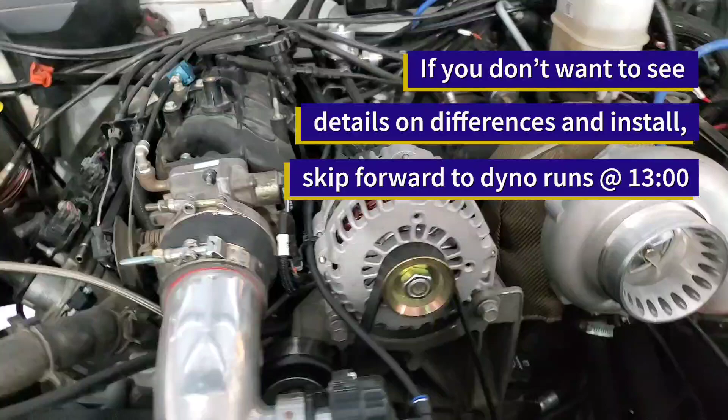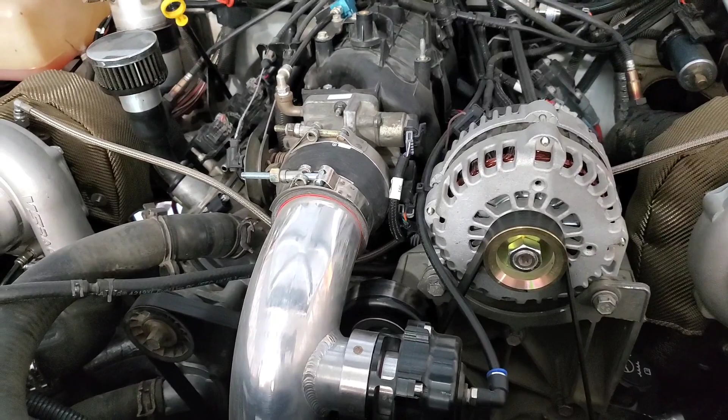There's quite a bit of videos on YouTube showing how to do this intake swap, so I'm not going to do a how-to on this one. But I will show some results before and after, and maybe take a few short clips in between if there's something I want to show you guys.

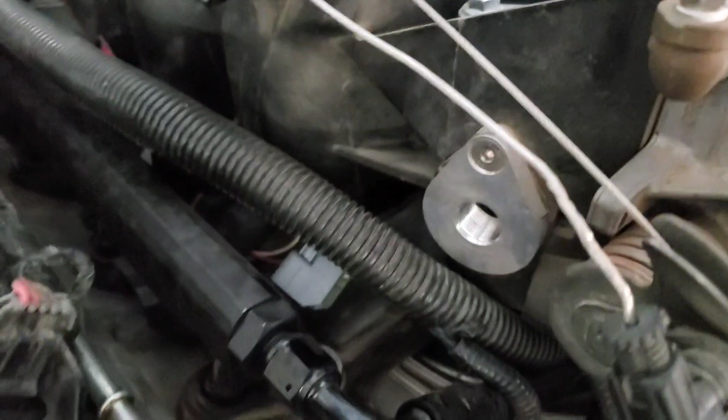I do want to point out I have this evap block plate on this intake, as well as the EGR block plate, which I had my intake air temp sensor mounted in there.

And I'm running these eBay fuel rails that somebody suggested on Facebook. I don't remember where, but somebody told me to look on eBay for them. There's a logo on them, I cannot quite remember what brand they are, but if you guys are interested in these rails, just search on eBay for Silverado truck intake fuel rails, and they come with the proper mounts that you need, so they bolt right in. My injectors are a little bit longer, so I had to put spacers.

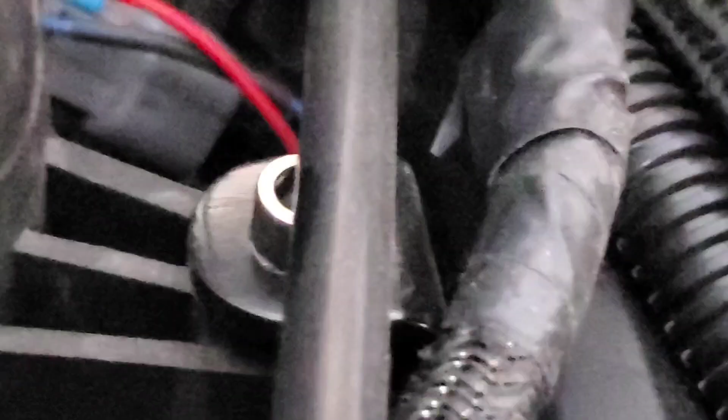I don't know if you guys can see, but I ended up having to put spacers underneath the bolts. Let me see, can't get a clear shot of it, but I'll take a shot of it once I take the intake off. On that one, maybe you can see - yeah, little plastic spacers underneath them. So yeah, they work really well, bolted up really nicely, no leaks, nothing. So I'm very happy with them.

But yeah, I'm going to go ahead and get started.

All right guys, we are back and about halfway there. Actually, putting it together always takes more time than taking it apart, as we've learned so many times. For those of you that have worked on cars, it's a lot harder putting stuff together than taking it apart. But let me show you a little comparison between the two.

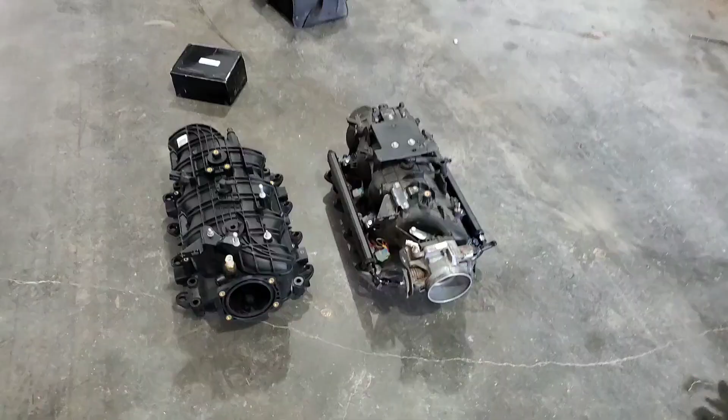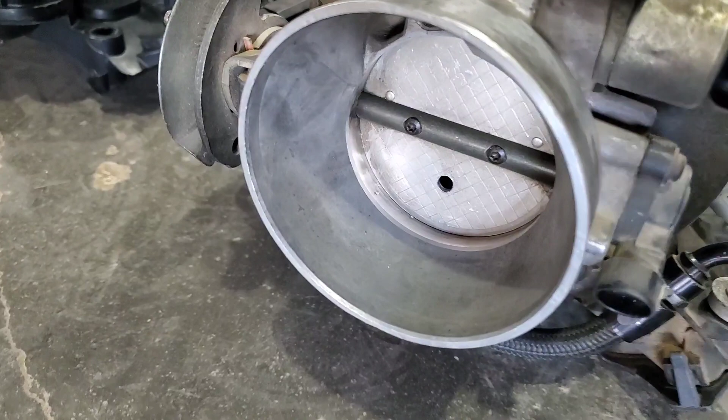So here's the old throttle body that's been on the truck, or intake, sorry, and throttle body. I've been running an unported stock throttle body, unless you call drilling the air hole out porting. But yeah, it's a tiny little dude. It doesn't look too bad, but compared to the new one, it looks pretty tiny.

There's my new 2000cc injectors from FIC. These rails, like I said, use the factory bracketry, or mounting points I should say, and they bolt up from underneath. So they're pretty nice, I'm actually really impressed with them.

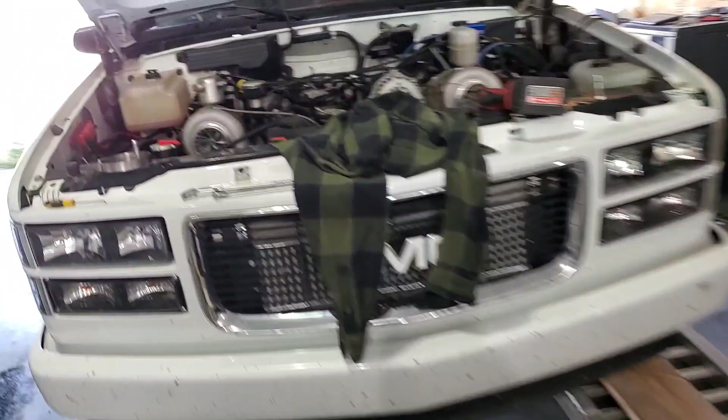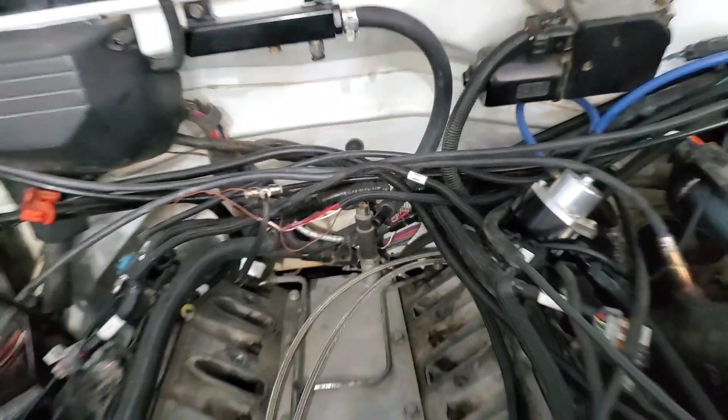But yeah, so we have the same vacuum port in the back on both of them, which I am using for my vacuum block here. I don't know if this thing will slide into that intake. I might try it, and I don't have to pull it off of that hose. Let's see what other - this vacuum port I'm using for my fuel pressure regulator. This one also has it, hasn't been opened up yet.

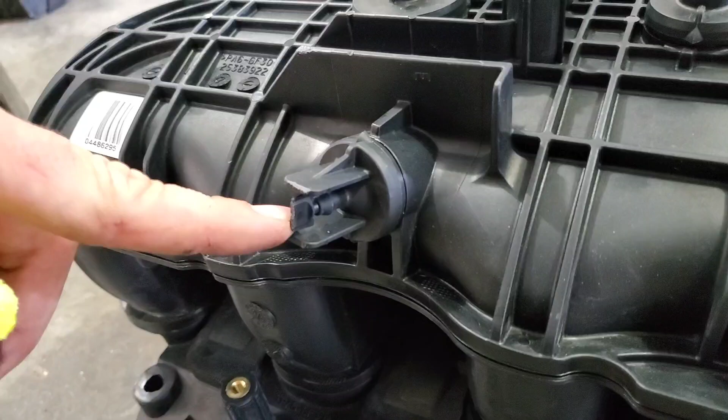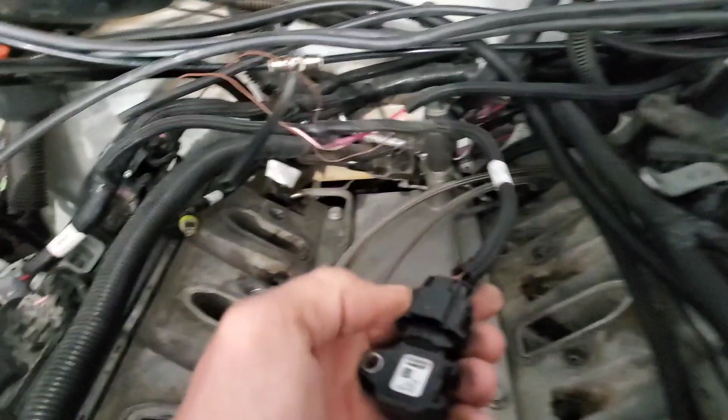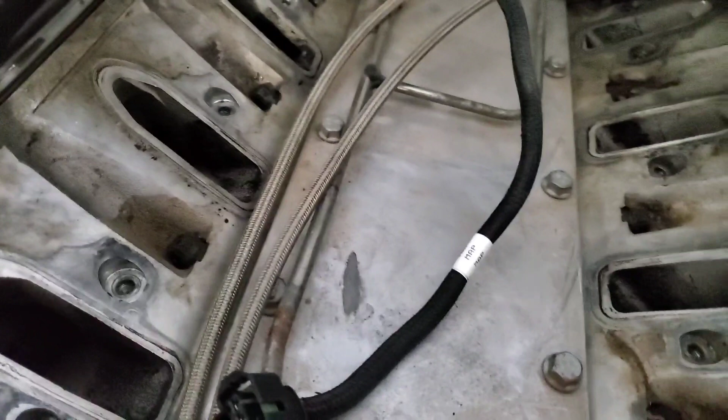This is an LSA plug, which I modified to make it work. Let me unplug it here, I'm going to have to put the phone down. So what I modified was those two teeth right there. I had to cut them down, the bottom two, so it only has the top two. I didn't cut them all the way down, so it plugs in a little bit hard, but it works because this thing does not have room for teeth.

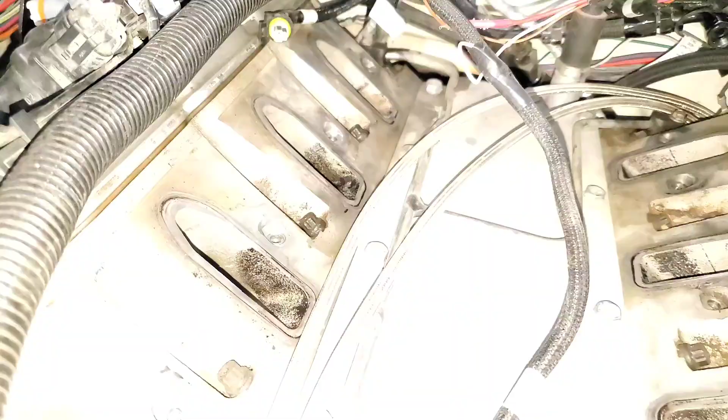Let me see if I can get some light in there, turn my flash on. There you go, you can see the notches are in a different spot, they're actually closer together, the bottom two. The top two are the same amount apart. So the top two work, but the bottom two on the LSA MAP are further apart.

This is an LSA MAP adapter harness from Holley actually, and I hardwired it into my Holley harness. So anyway, I made that work.

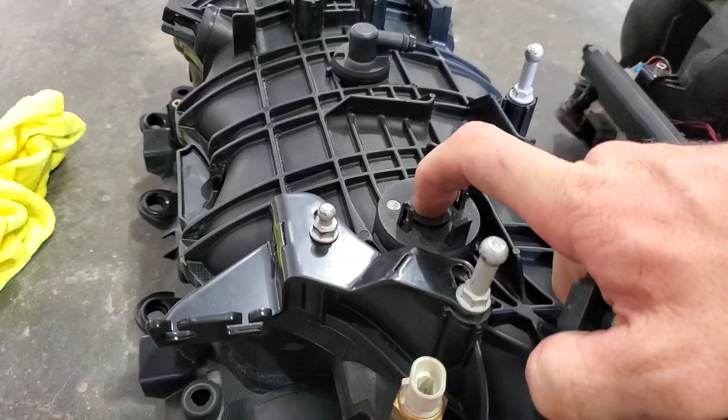Let's see, I was actually hoping that this would fit, but it does not, so I'm going to have to plug that hole. I'll probably use this with a short piece of hose in between there, and we'll use that for the MAP sensor. I think that's going to be my best option.

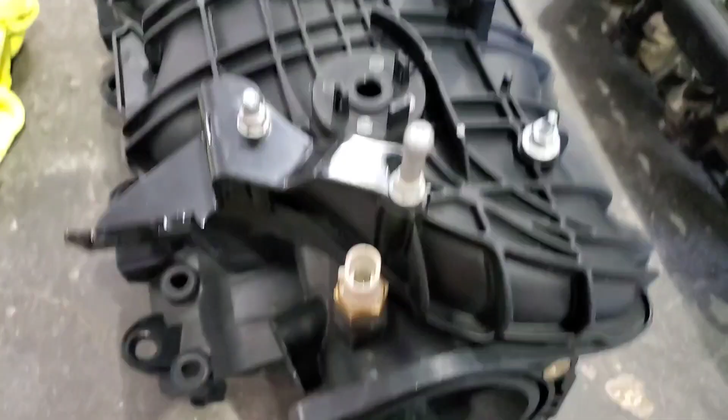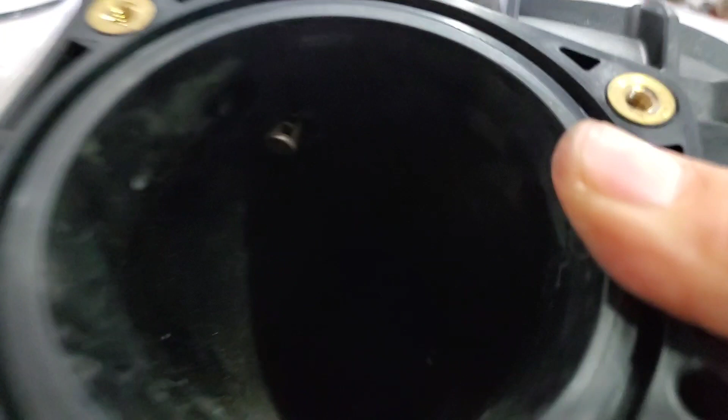And the IAT, this was factory, it was an evap port, kind of like where they had the solenoid on the newer trucks with the solenoid in line. So this just had a port. I cut it down, drilled it out, tapped it, and got that in there. You can see where the sensor peeks through a little bit, so I think it's enough to get a pretty good read on it.

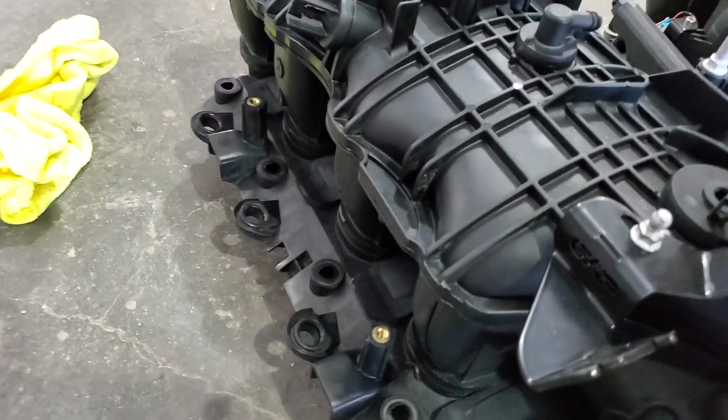So I'm going to get these rails and stuff swapped over. Oh yeah, I also bought this - what brand was it again? It was GAP Performance, I think. Or GAP, Glenn's Auto Performance, that's what it is. I bought that bracket, it looks really nice and it's adjustable, so you can slide it to make it work right.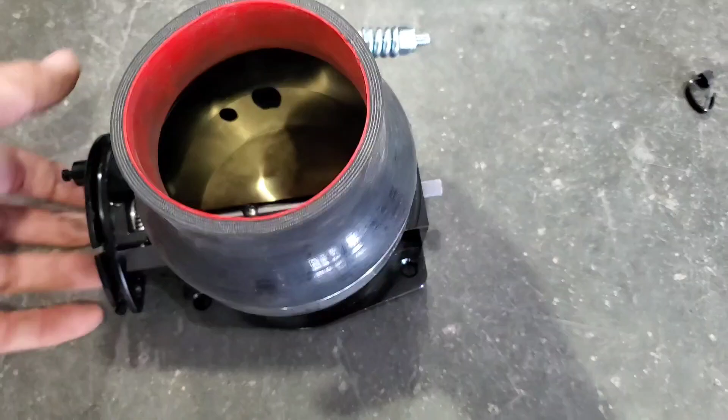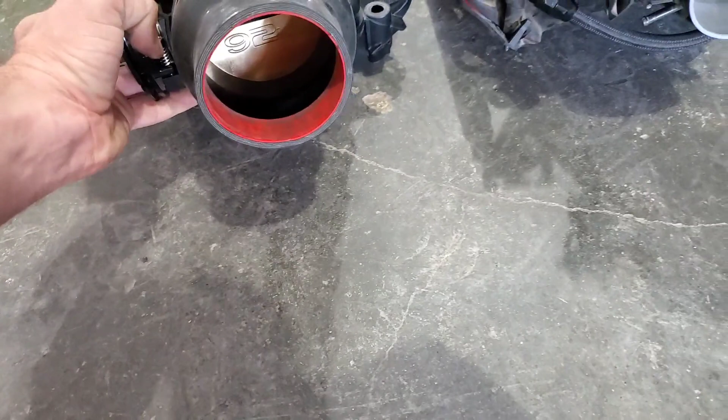And I bought one of those cheap Amazon throttle bodies, it was like 80 bucks or something like that. No, I don't have a video of it without the boot on there - I put the boot on. It was a little bit of a hassle fitting it, 92 millimeter, so that will go right on there. I'll take that throttle body off and put them back to back so you guys can see the blade size difference.

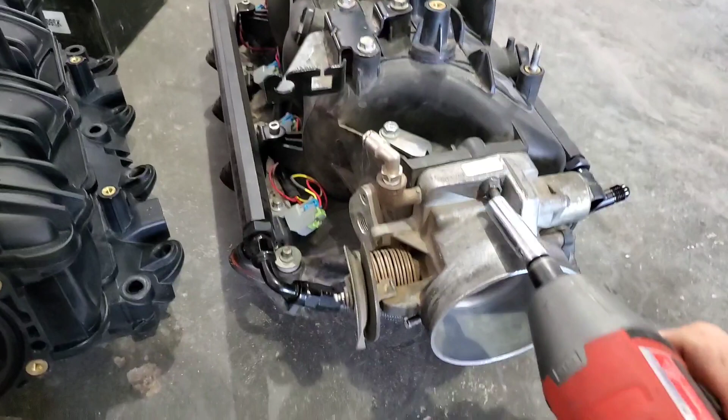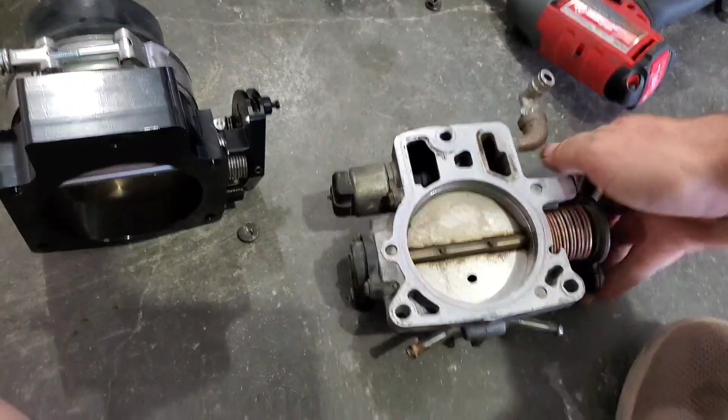So that is the stock throttle body, and that is the new one. I'd say there's a significant increase in flow. I guess it kind of depends on how you hold it, makes it look a little bit bigger - can't really get them really close, but it's quite a bit bigger. So it should gain a little bit of airflow there for sure, but I still don't think it's much of a restriction on a boosted motor, but it does something for sure.

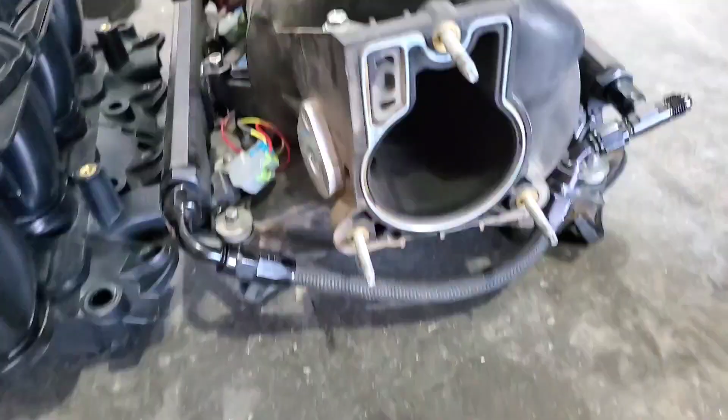So there's the intake side-by-side openings - obviously you can see the difference there as well. But anyway, I'm going to get this stuff swapped over and we'll get back with you.

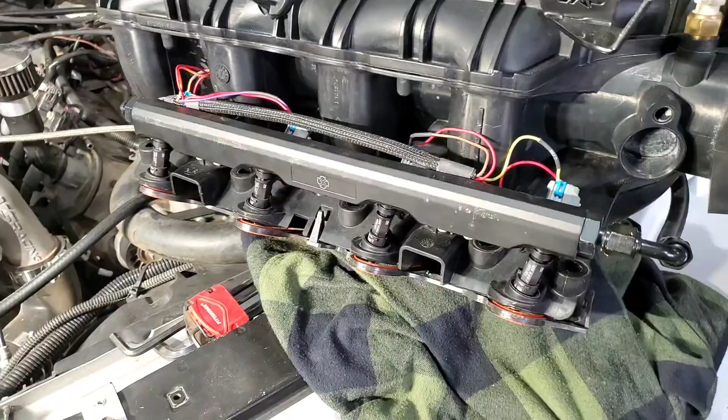All right guys, so this is the finished intake. Whoops, I scratched it up a little - that's right, it won't stay new forever. I actually bought this intake used, but I washed it at the car wash with some degreaser and it turned out really nice. Got the throttle body all mounted up.

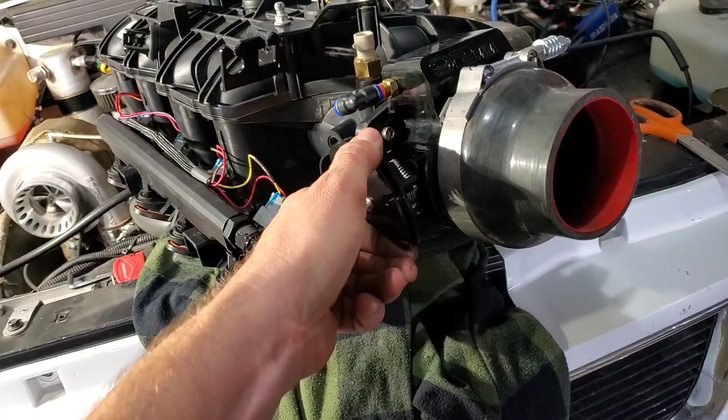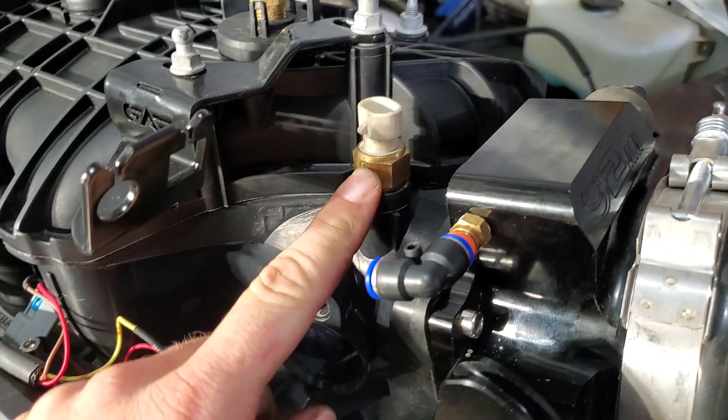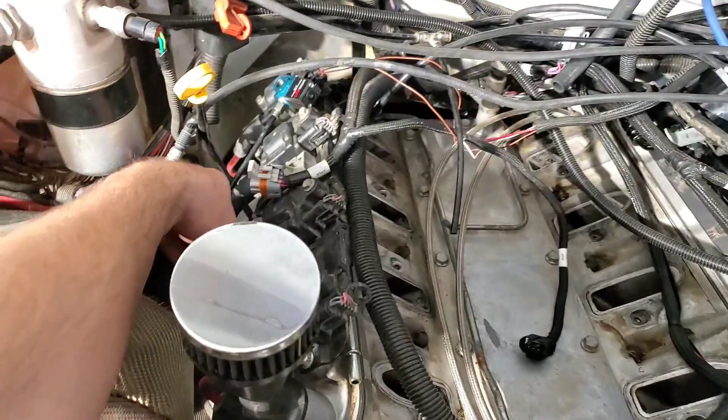Oh yeah, lots of airflow. Intake air temp sensor here, I think I already showed that. I did this for my boost control - my boost solenoid is right there, it lays over the top of the intake and goes in there. That runs to this hose, which goes to the top of each wastegate.

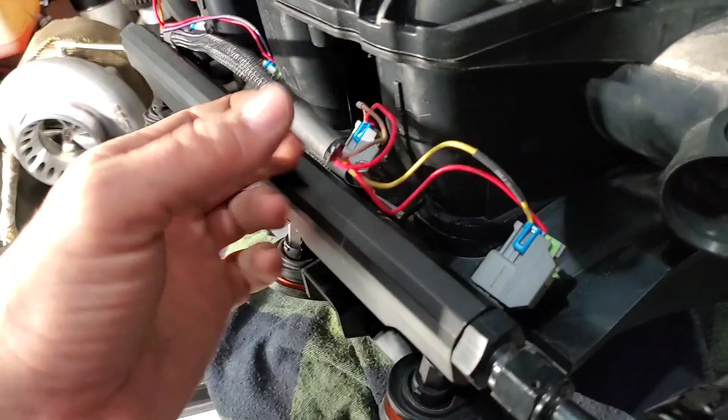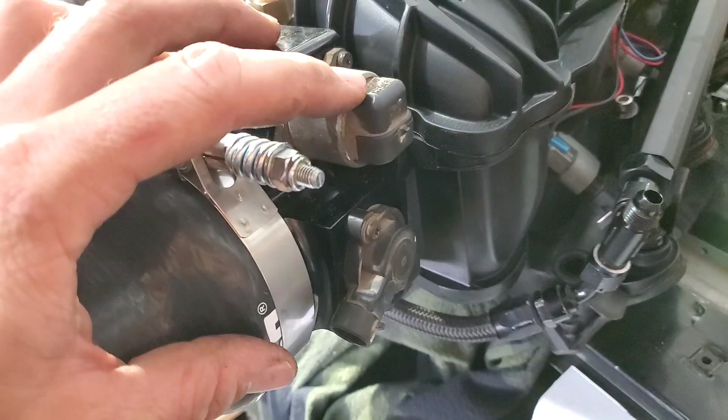Let's see what else - the rails fit great, I had to change the brackets out to make them fit. The IAC and the TPS all worked off the old throttle body, even the gaskets - the gaskets are off the old intake, and they're a direct fit on these intakes as well, for those of you that didn't know.

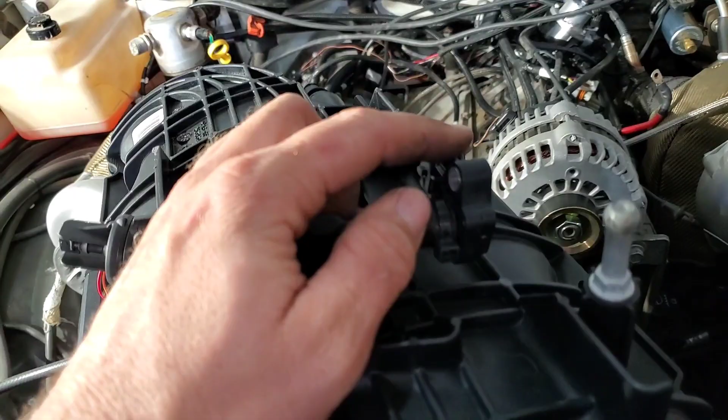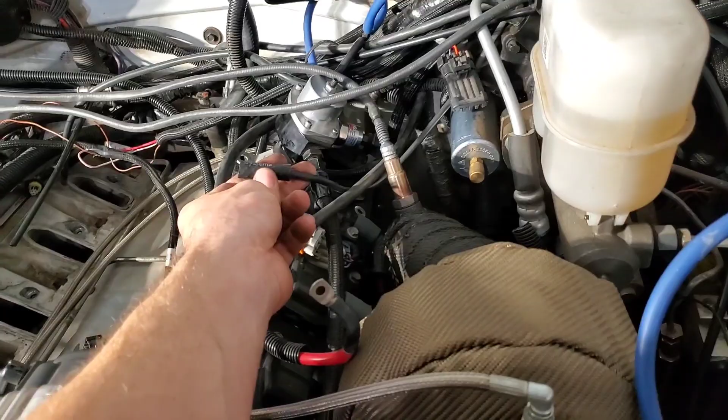I ended up plugging the MAP sensor hole, and I'm using that one for the MAP sensor instead - I'm not going to use this one. I'm actually going to get everything out of that vacuum block right there. I'm going to get the boost gauge, which is this hose, put a little fitting on there and run it directly over to the vacuum block instead.

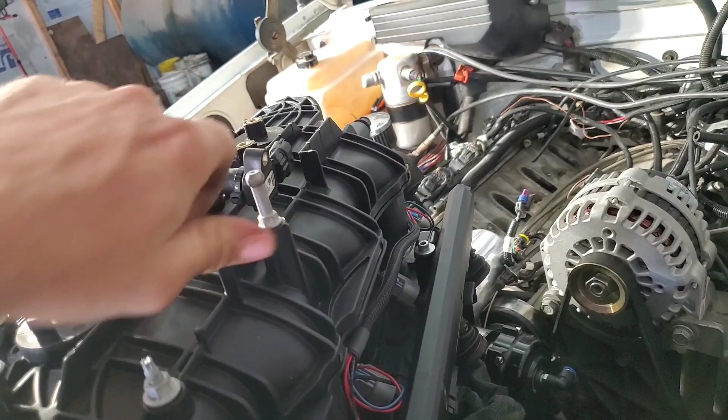Let's see what else - oh, and the fuel pressure regulator line I'm going to also run to the vacuum block. So we'll clean up a few fittings off the intake so we don't have to have as many on here. We'll leave these on there. I want to put an engine cover on it eventually.

So yeah, I guess I'm ready to put this back in there - it's not going to be very fun. What's crazy is those ports actually look kind of dirty, but they are cleaner now than they were when I put the heads on there. So E85 really cleans the ports up, so that's nice. But yeah, I guess we'll do some more video once I get it done.

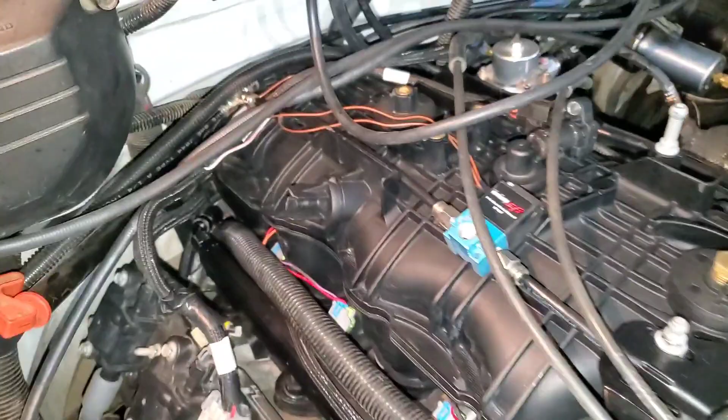Hey, what's up guys, we finally got done putting the intake on, the camera around. It was a lot more work than I thought, but we got it all lined up everywhere, no leaks anywhere. It worked out pretty good. The only thing I didn't like was the angle of the pipe going into the throttle body, because the throttle body's angled up on these TBSS intakes. But that's the only other difference as far as everything fitting, so otherwise it worked out pretty good. I'm going to go ahead and make some runs and we'll see what she does.

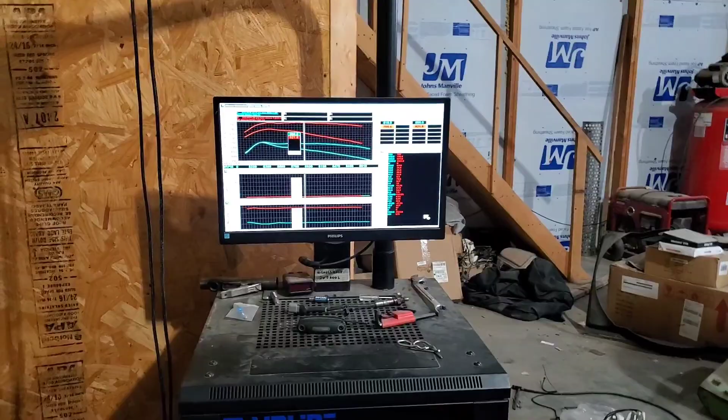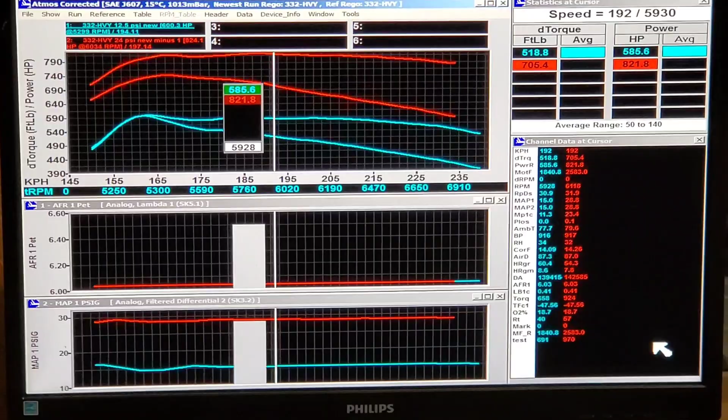Alright guys, so basically these are my previous runs. We got 12.5 psi, made 600 horsepower, that's the teal lines, and then we got 24 psi, and those are the red lines. So yeah, we'll see how these two compare. I'll go ahead and make a run here.

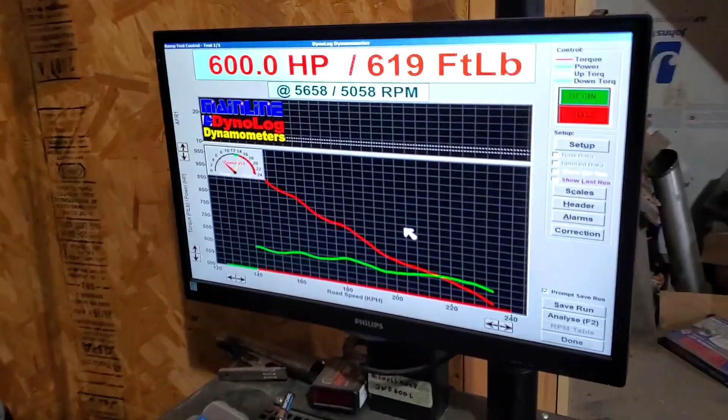Alright guys, so after analyzing the run, the weather is slightly different, so I don't know how much that has to play, but it looks like up top it was definitely gaining more power. As you can see there, it picked up about 22 horsepower, went from 557 to 580.

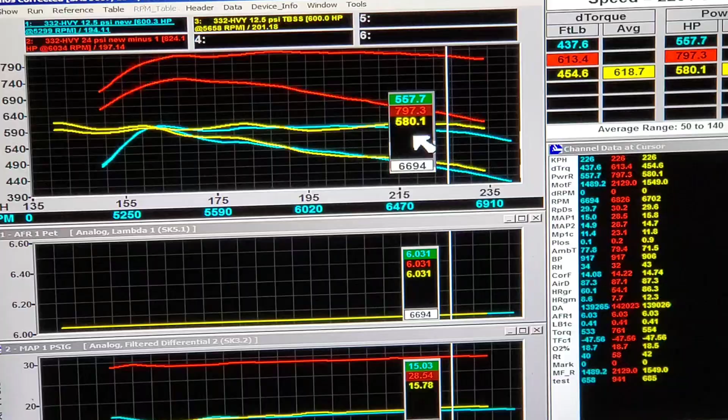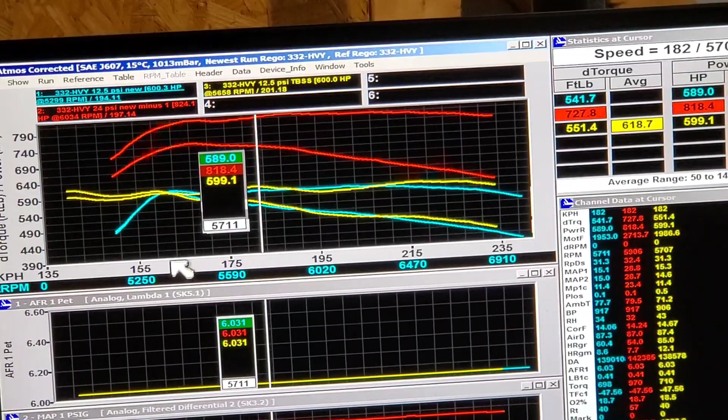But the peak horsepower was pretty much the same between the two. You got your 600 peak. This one made it at a higher RPM though, right here, 599, where the other intake was making 589, so it was down 10 horsepower.

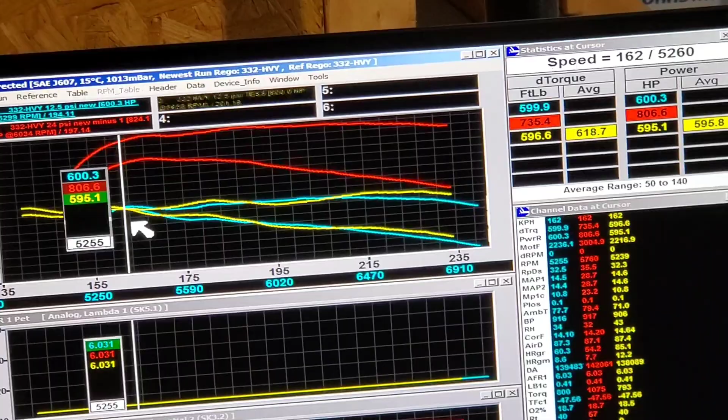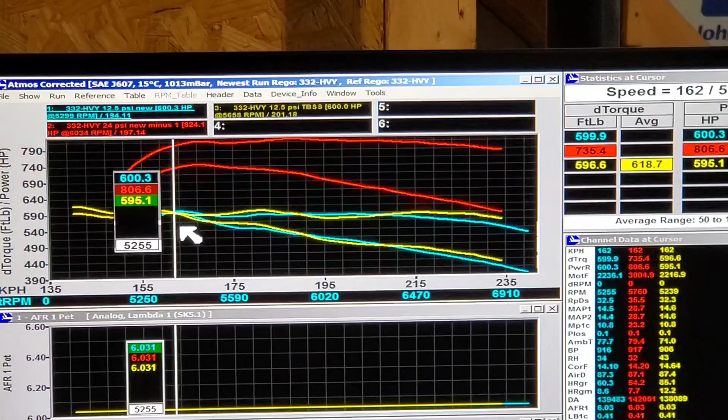But down here, at this RPM, 5200 RPM, the stock truck intake did a little bit more, but that could have been a boost spike as well when the boost came in, because that's where it peaked out. Looked like it was up everywhere except here, and I can't really say what caused it to be down here a little bit.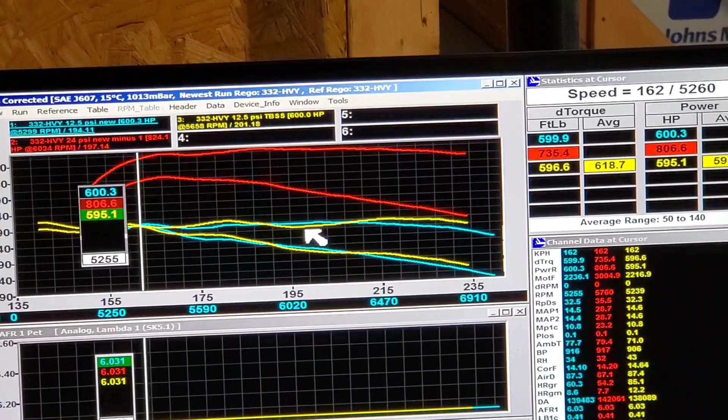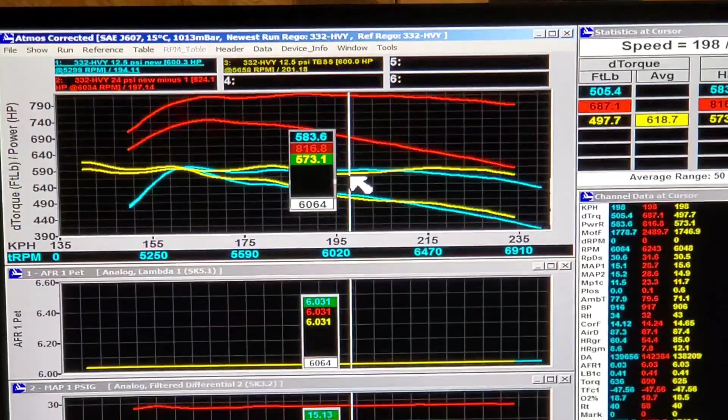Maybe a little too much timing or something. Looks like we were at 583, 573. It was down 10 horsepower right there for some odd reason. So we picked up a little bit of power, not very much though, and we'll see what happens when we go a little bit higher boost. Go from there.

Alright guys, we're going to do a pull now with 24 pounds of boost. We'll see how it goes.

Hey guys, I just wanted to cut in because I totally forgot to go over the data for the 24 PSI pull. It gained about 10 horse on the peak, but again, the peak was something that was only relevant at the very beginning of the pull, because with my torque converter, it makes the most power at the beginning of the pull almost every time. But where I noticed the biggest gain was throughout the higher RPM. Again, it was up about 20 horsepower or so throughout the run. So I just thought I'd share that in here real quick, since I forgot to record going over the data when I was at the dyno at the time.

And these next few runs are going to be on 27 pounds of boost. Alright guys, we're going to make another run on 27 pounds. 27.1, just like we did the other day. See what it does there.

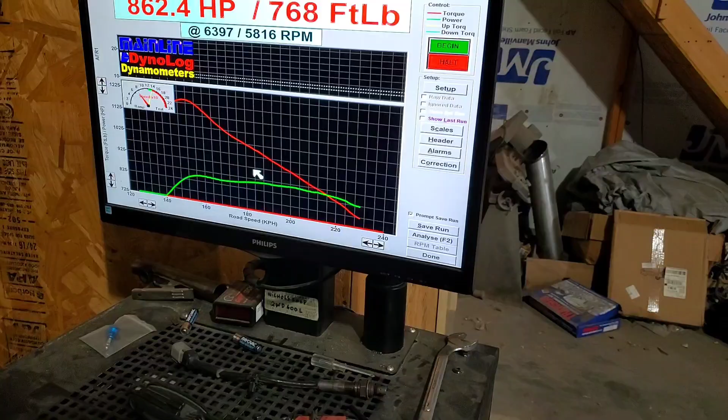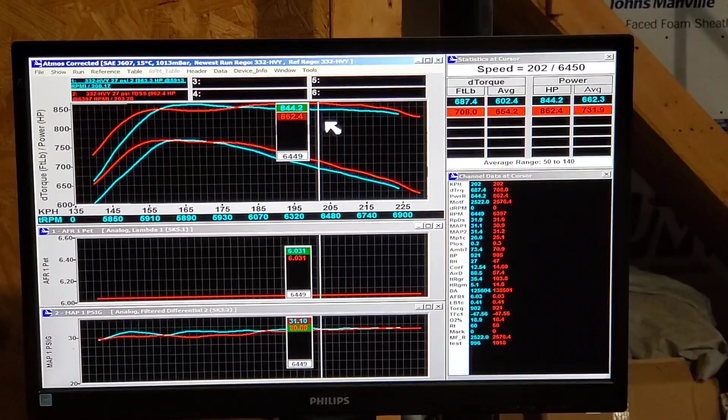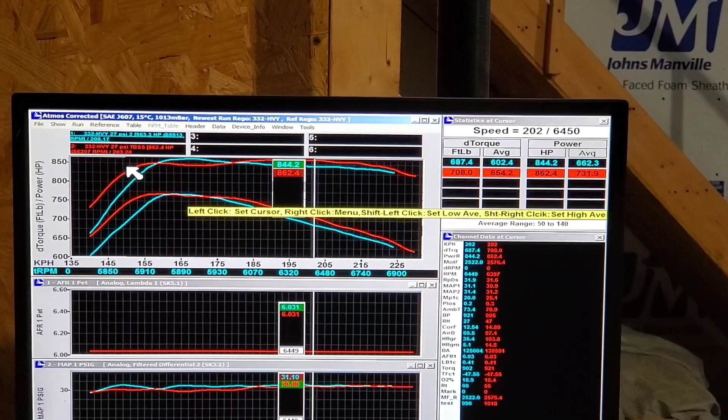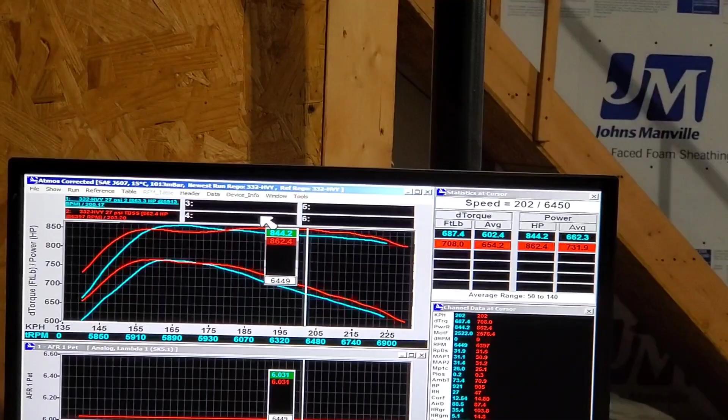Alright guys, so here's a comparison run. 27 pounds with the other intake and 27 with this one. Now what happened over here, the red run was the one I just did now. So I started the run with more boost built than I did with the other one. So what happens on the data log, you can actually see it. The boost climbs quickly, wherever it peaks up and then comes back down. So this run right now, it peaked up here and then came down and then it recovered and brought the boost back up. Granted, this is only like a pound or so, but a pound of boost is 20 horsepower.

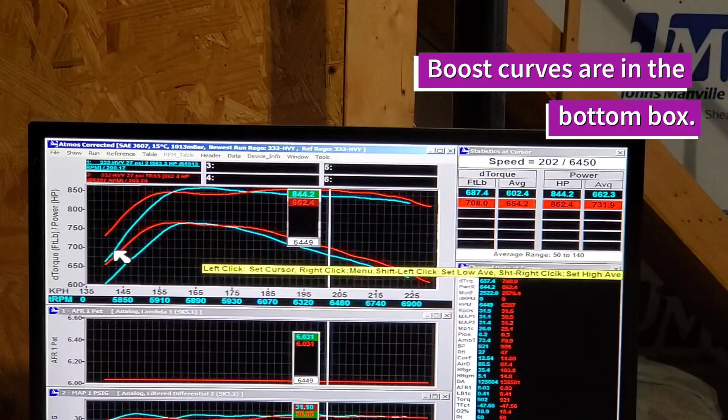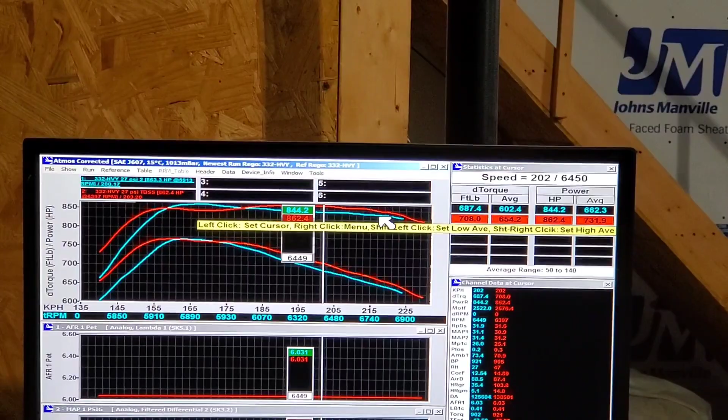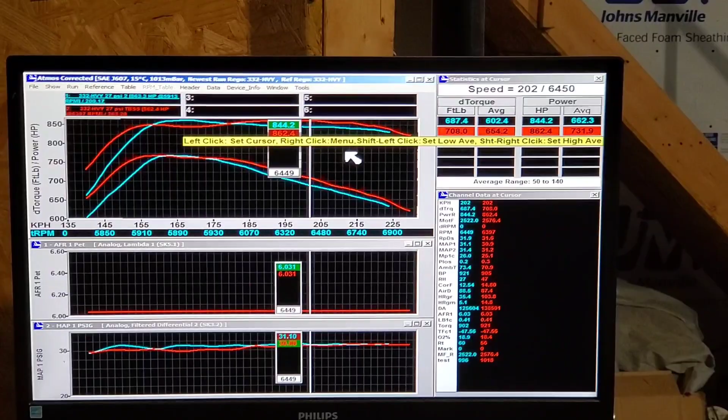And the teal line was the run from the stock intake, and it would overshoot the boost a little bit more and then come back down. But as you can see here, we did pick up about 20 horsepower, 10-20 horsepower through most of the run. So it was a slight improvement, not very much for the intake. But again, I was already thinking that anyway. It's my heads that are limited, not the intake manifold. At least with this intake manifold, long runner. If I went to a short runner, we'd see a lot bigger gains up here, up at the higher RPM towards the end of the run.

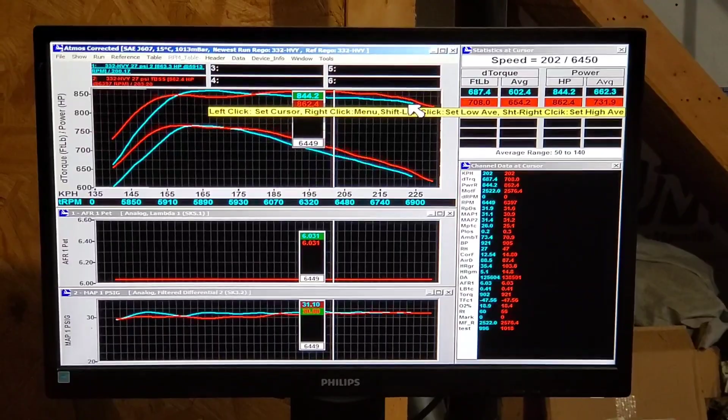Let's see the, whoops. Can I make that go away? That was at 6,800 RPM. And it was up, looks like 10 horsepower, 10 horsepower right there.

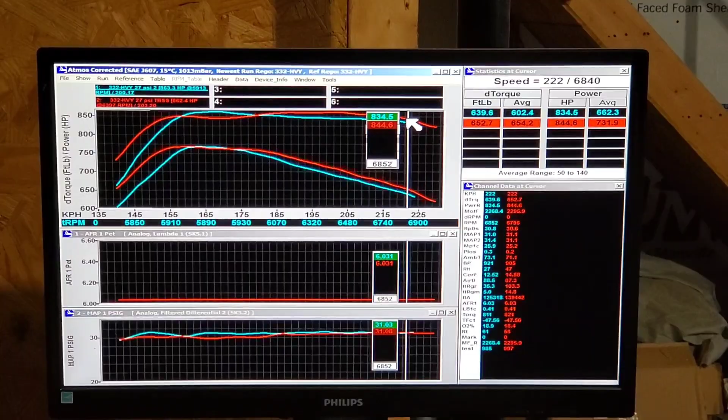So, yep, I guess. So that's gonna conclude the video for today. I was hoping to see a little bit more gains than that, but that's how it is with the horsepower game when you're chasing it. I was expecting to see closer to 30, 40 horsepower gains, because typically the TBSS intake will pick up 15 horsepower naturally aspirated, which would mean that it would pick up 30 horsepower on 15 pounds of boost, which it did. What was it, 20 horsepower or something like that? I don't remember, but it picked up about the same amount of power throughout the entire range on low boost and on high boost. So it's kind of interesting.